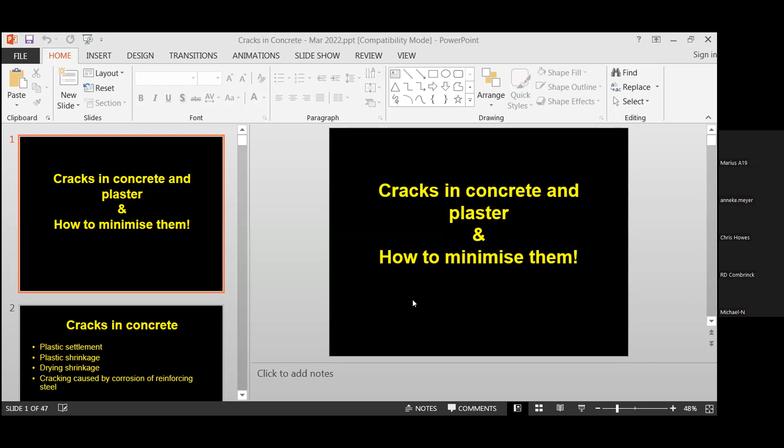Right, so the title is Cracks in Concrete, and it's quite a long subject. So I've highlighted a few of the most common cracks, the ones that are most easily dealt with, and there's a list of them.

I'm going to talk about plastic cracks, which have been classified as non-structural cracks by the British Concrete Society. They have a publication called Non-Structural Cracks in Concrete. I'll show you an interesting case study where one of those cracks, a plastic settlement crack, had a structural aspect to it, causing a failure. Then I'll spend some time on drying shrinkage cracking and also cracks caused by corrosion of reinforcement steel, because that's quite an important cause of cracking.

What I want to say at the outset is that it's easy from an academic point of view to classify cracks into these categories. But very often when you diagnose a cracked structure in practice, you'll find there's a combination of factors which result in a crack being what it is. Very often it starts as a plastic settlement crack, which becomes wider because of plastic shrinkage, and then as the concrete hardens and dries out, it becomes even wider still due to drying shrinkage, and can become a lot longer and wider. So in the real world, it's a little less easy to categorize these cracks.

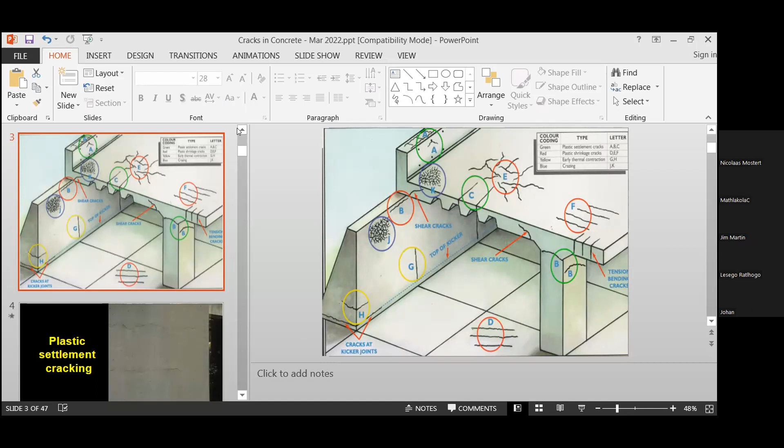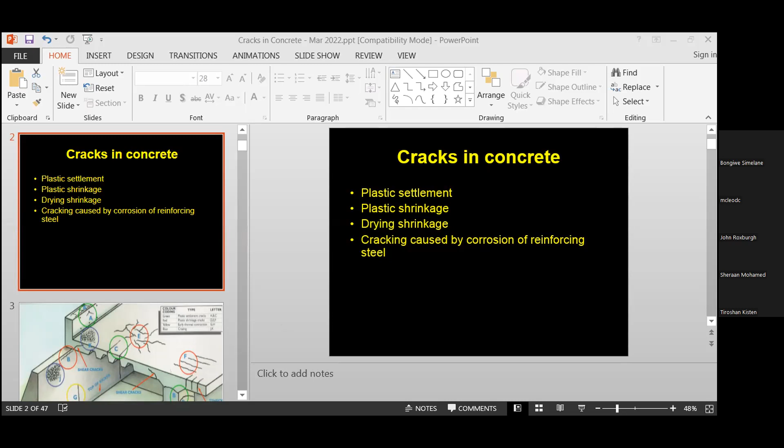It's not going to the next slide. Could I suggest you click on the presentation icon, just to the left of the size percentage bar? Let's see if I can find it. Sorry Rod, can you go back to the previous slide for a moment? There, can you see it? Okay, yes. Can I go forward? The toolbar from Zoom is getting in the way. If you look in the toolbar where it says comments, click the icon four positions to the right. I'm trying to get there but the Zoom toolbar is blocking it. Click on the Zoom toolbar, that should take it away, then you should see your full screen so you can get to presentation mode. It just keeps coming back, Hanley. Can I stop sharing for a moment? Yes, sure. Is that any better? At the moment you're not sharing, we can't see your screen. Okay, I'll go back and share. We had a comment that F5 is the shortcut to start the slideshow, so once you start sharing, try F5. You're still not sharing at the moment, Rod. Yes, I've got to get back to the share screen. I've lost that share menu altogether now. Just click at the top or bottom of your screen to get the menu back. Please look at this. Oh yeah, hello, can you? If you click anywhere on your screen, or move your mouse, you should get the bar back where you can start sharing. Right, usually there, I've got it. Let's come back, there we go. Can you see it? No, mate. Click on share screen, share. Okay, now it says you've started sharing. Now try F5, Rod. I'm pressing F5. At the bottom of your screen, three spaces to the right of your cursor should be presentation mode. Just move your cursor up to the black line, a little higher, a little to the side, a little down again. In the black line at the bottom you see notes, comments. No, I don't see notes or comments. Can anybody else assist Rod? If you can see your top toolbar, click on slideshow and start slideshow. Click on slideshow, there we go. Okay, I've clicked on it. Double click. Okay, from beginning, click on from beginning. Go to your left, from beginning. There you go, click. Yeah.

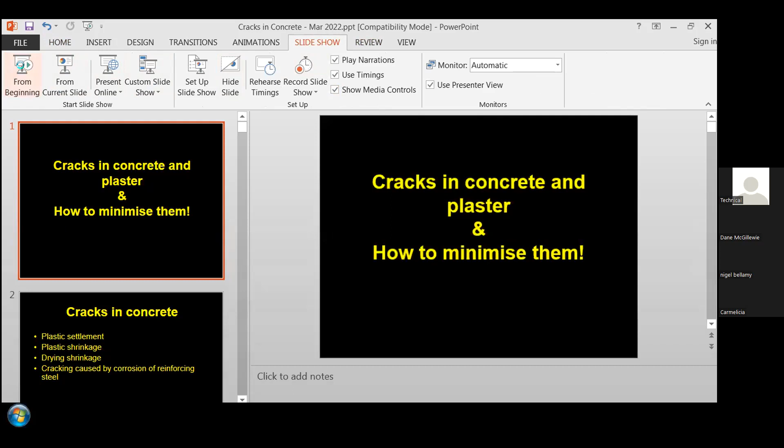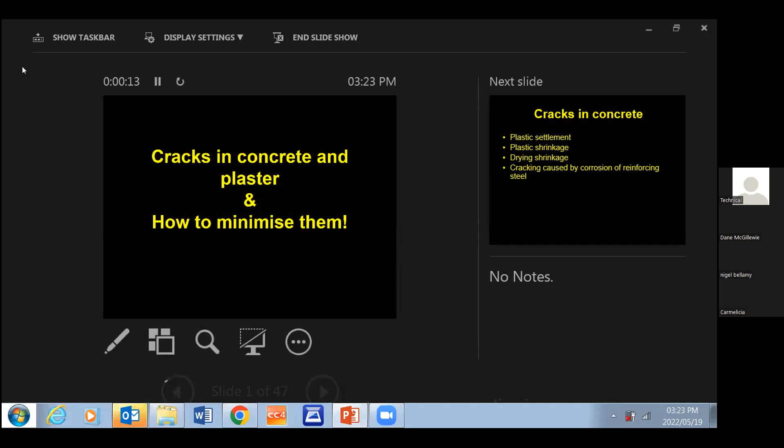Okay, what can you see now? Okay Rod, there's obviously some setting issue in your presentation, but I think you can carry on. We can at least see the presentation. So you can start with yes, let's do it that way.

So there's a schematic diagram that shows the cracks in their purest form, as you would classify them. In reality, they're often a combination of different factors that result in the crack's final proportions and shape.

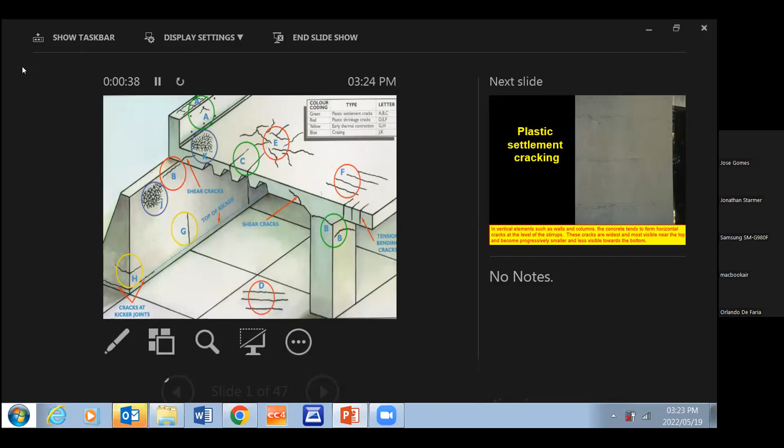The first type of crack here is plastic settlement cracking in columns. This is an elevation of a column, near the middle of the column I suppose.

What causes these cracks is the fact that the solid ingredients in concrete - the stone aggregate, sand, and cement particles - have a relative density greater than water. If you imagined a bucket of water into which you threw handfuls of sand, stone and cement, the solid particles would settle to the bottom. The same thing happens when you mix an homogeneous mixture of concrete, place it, and compact it - the solid particles start settling downwards.

They're pulled down by gravity, and the rate of settlement depends on the size of the particles. Bigger particles tend to settle faster than smaller particles because of a phenomenon known as Stokes' law. It's got nothing to do with density - it has everything to do with the ratio of volume to surface area. Very small particles have low volume and big surface area, so they're more inhibited from settling by drag. But the potential for settlement is greatest at the top of the wall or column and least at the bottom.

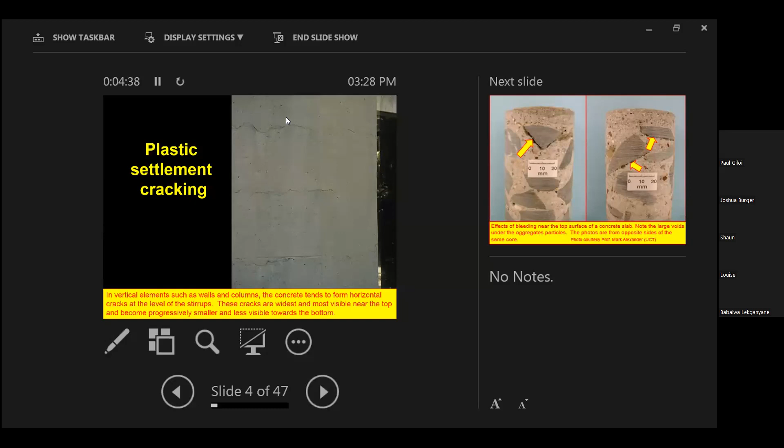The cracks tend to be narrowest near the bottom of the column or wall, and widest near the top - purely because the relative propensity for settlement is much greater at the top than the bottom. If you test concrete for durability properties, you get much better results drawing cores from the bottom than from the top, because there's much more water near the top, and more of these cracks near the top.

Here's a picture of a core - the same core, front and back - where you can see what we call bleed water discontinuities beneath the horizontal surfaces of coarse aggregate. And here you can see some more bleed water discontinuities, caused by the bleed water being trapped beneath these horizontal surfaces.

Here you can see some more alarming ones on a column. These are very typical, and they also occur on horizontal surfaces. This is a surface bed, in fact a raft foundation. What you see here is the cracks form a regular geometric pattern, which corresponds exactly with the reinforcing mesh that was used here. These are roughly 200 millimeter by 200 millimeter cracks.

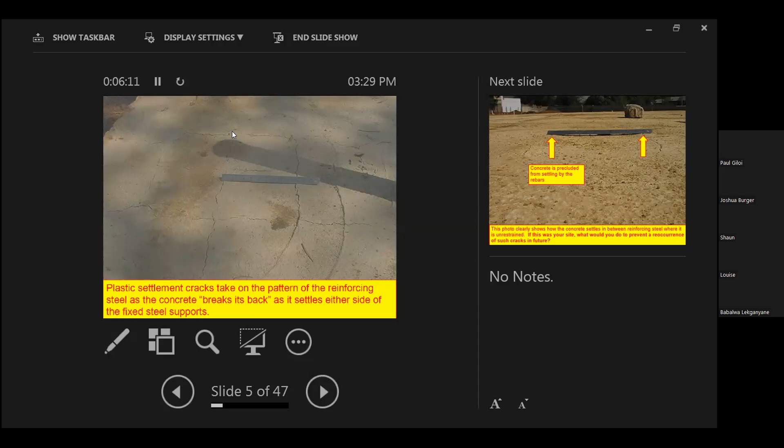In the case of a slab, the reinforcing provides a restraint on the settling aggregates and particles. The only way these aggregate solid particles can move around the reinforcing bar is if they move laterally, sideways, before they can move vertically downwards. As a result of that sideways movement, the concrete effectively breaks its back over the reinforcing steel, which is fixed in space. If you look at a very acute angle, there's a straight edge here, and you'll see a gap forming between the bottom of the straight edge and the middle of that span. So the highest points on the concrete are directly above the bars, because the bars are supporting the concrete and restraining settlement. But in the middle, the concrete's free to settle.

So the million-dollar question: if this was your job and there was a risk that your company wasn't going to be paid because of these unsightly cracks, what would you do? It's difficult to ask the audience for an answer here, but I'll just put you out of your misery and tell you — the thing you would do is revibrate the concrete.

You'd put your poker vibrator in half an hour or an hour after you've initially vibrated it, and stir it up. You can't prevent these cracks forming, but once they're formed like this and the concrete's still plastic, you can eliminate them. By putting your vibrator back in and vibrating the surface, you shake off those stones which are precariously supported by the rigid reinforcing bar. You shake them to the left and the right, and it flattens the surface and knits the concrete together. It knits those cracks back together. It's as simple as that.

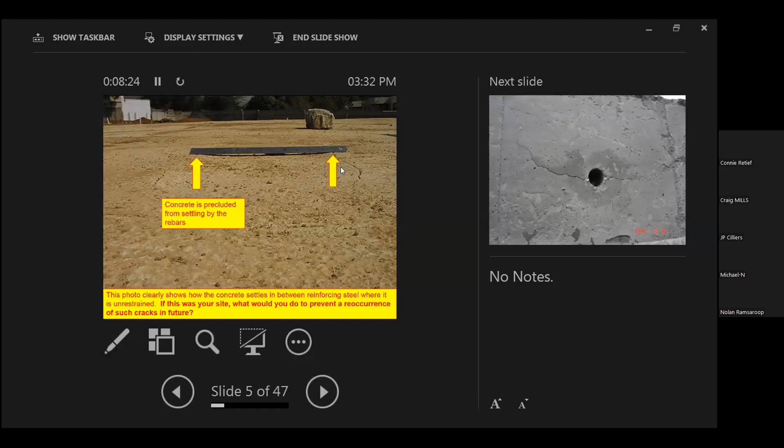One must bear in mind that after you've revibrated, settlement will continue again. So you've got to keep on revibrating the concrete until such time as the concrete goes hard. People often say, won't we over-vibrate the concrete? The answer is no, you won't — I've proven it. If the mix has been properly proportioned and well designed, all that will happen is you might get a little bit more stone near the bottom, but you won't have any cracks. It's far better to vibrate the concrete more than you need than to under-vibrate it and risk all the problems that come with under-vibration.

Now, the same mechanism occurs where you've got a tie bolt hole. This is a tie bolt hole in the shutter, and exactly the same thing happens. The concrete above the tie bolt is supported and restricted from free settlement, but the concrete underneath the tie bolt is free to settle. Again, the remedy for these cracks is exactly the same — just revibrate the concrete. On a shutter, it even helps to just take a rubber mallet and thump the face of the shutter. That stirs up the concrete near the surface and eliminates those cracks.

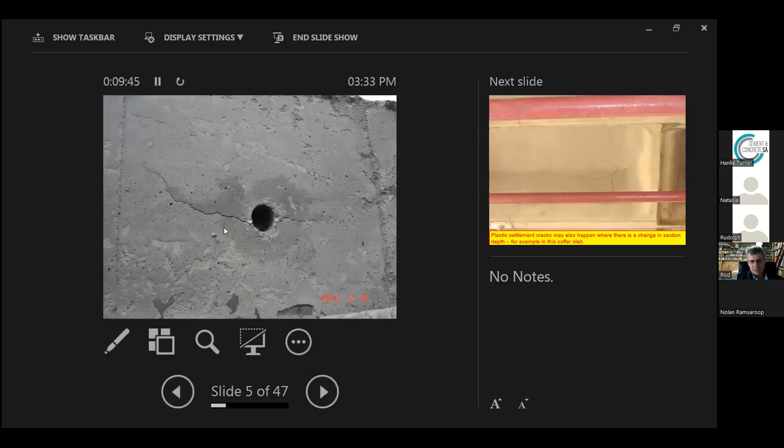It's really worth doing that because clients get quite upset. In that first picture I showed you of the raft foundation, the contractor didn't get paid for that. He had to cast a new slab on top at his own expense, despite the fact that several engineers, including myself, went to site and assured the client that these were non-structural cracks. If he was going to put a screed on top of them, there was nothing to worry about — they were dead cracks, very unlikely to reflect through the screed. The client insisted, and that caused the contractor a big loss.

Here's something interesting — this is a coffer slab. What happened here was they overdosed a lignosulfonate-rich admixture, and the concrete didn't set for several days. Now, if the concrete remains plastic, it continues to bleed and continues to settle. If it remains plastic for a prolonged period of time, the plastic settlement cracks just become larger — longer and wider and more unsightly.

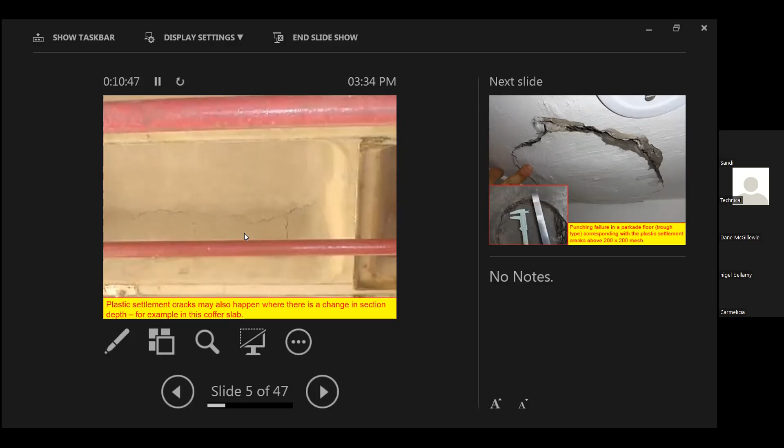So if you ever have a situation like this, where the concrete's not setting because it's very cold or it was overdosed with a retarder or lignosulfonate admixture, the thing to remember is to put the poker vibrator back every few hours and give it a stir. It won't affect the hydration, won't affect the setting much, and it's worth doing to eliminate these unsightly cracks.

Now, this is an interesting case study — this is the one I told you about, where these so-called non-structural cracks became critical and structural. This was a parkade in Bank City with a coffer slab, and the coffer slab was only 75 millimeters thick.

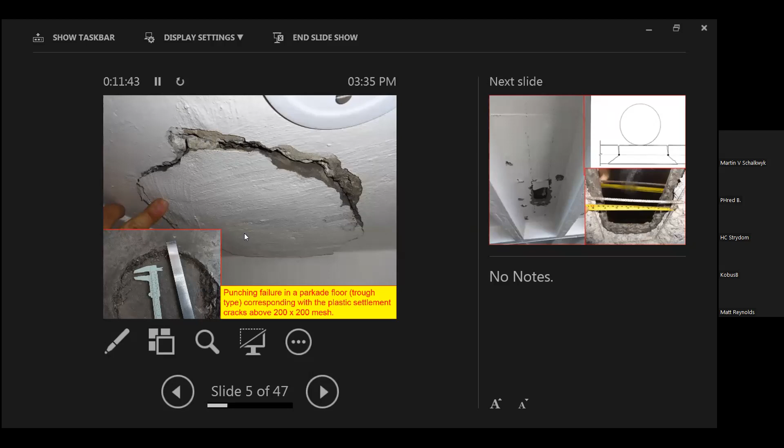In the middle of this coffer slab was a light steel mesh, right in the middle of the 75 millimeter thick section, a 200 by 200 mesh. And it just so happened that the dimensions of the mesh, 200 by 200, coincided almost exactly with the footprint of a motorcar tire. So when a motorcar drove over this, the full weight was borne by this little area of concrete.

Here's a little schematic, and you can see there's the mesh, another piece of mesh, the motorcar wheel, and the plastic settlement crack has caused a discontinuity between the top of the steel and the top of the slab all around the perimeter of the square mesh. So it's effectively reduced the effective depth to resist punching shear.

So all that was necessary was for a little area to punch out, about 35 millimeters deep. And there you can see the result of the punching. They had put a plate of mirror steel on top facing downwards, so you could see the reflection of the tape measure and the mesh here. But what's quite interesting is how the perimeter of the piece of concrete that fell out is defined by the mesh, the 200 by 200 mesh.

What we also found investigating is there was some plastic electrical conduit stuck in, fastened to the mesh, which made the situation even worse. But fortunately, it was restricted to just some local areas.

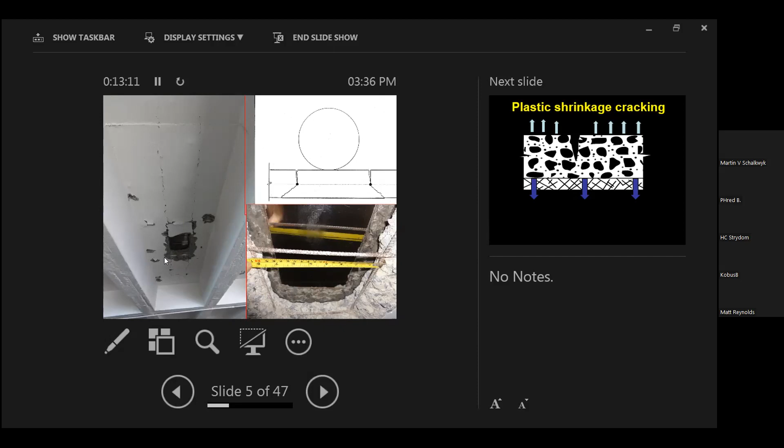Remember that as a rule of thumb, concrete has about 20% volume of water. With admixtures today, we get that down to about 17%. But if there's any loss of water, only two things can happen: either a complete reduction in the volume of the concrete, or it leaves voids behind. It's due to the reduction in volume that we get these cracks.

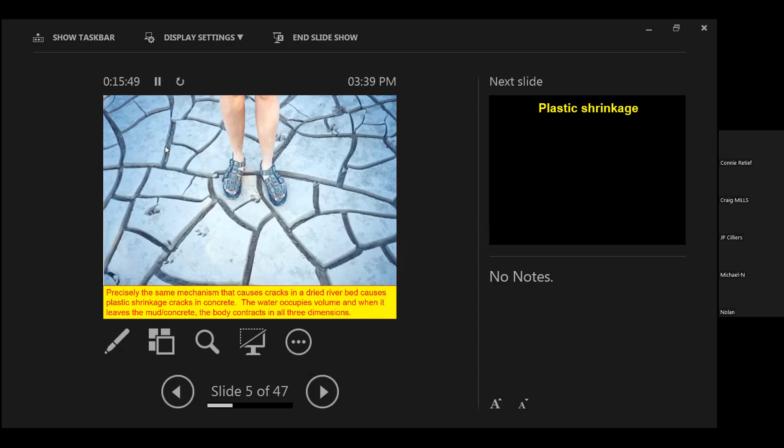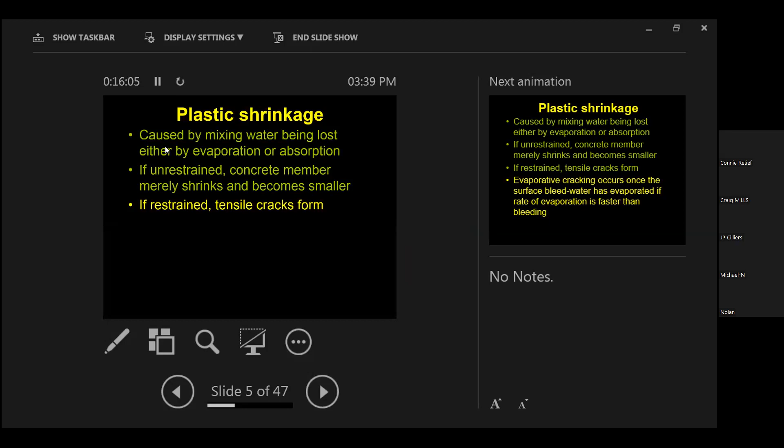And the patterns you get are very much dependent on the conditions at the time of placing the concrete. So this note really says that if there's no restraint, there's no cracking. It's very prominent in the interior of the country, very prominent on the highveld between the months of the beginning of August and the end of October, because this is the driest part of the season.

When you're placing concrete under conditions which are hot, going up to 30 degrees, and sunny and windy, where the relative humidity is low, then you get the maximum rate of evaporation of your bleed water. So when the rate of evaporation of water exceeds the rate of bleeding and the concrete surface becomes dry, that's when you're most at risk of these cracks. There's times of the year in Johannesburg where the weather's so non-conducive to placing concrete that I advise people not to place concrete.

If you've got 20 kilometer per hour wind on a 30-degree October day when the relative humidity during the day drops less than 10%, don't even try to place concrete.

To some degree, the presence of bleed water is a godsend because it's sacrificial. While there's a layer of bleed water on the surface, evaporation can't dry out the concrete itself. It's once the bleed water starts evaporating and disappears that the surface dries out very quickly. The presence of admixtures or additives that inhibit bleeding, something like silica fume or microsilica, would exacerbate this problem. So never ever put silica fume in a slab which you're going to cast outdoors. Not a good idea.

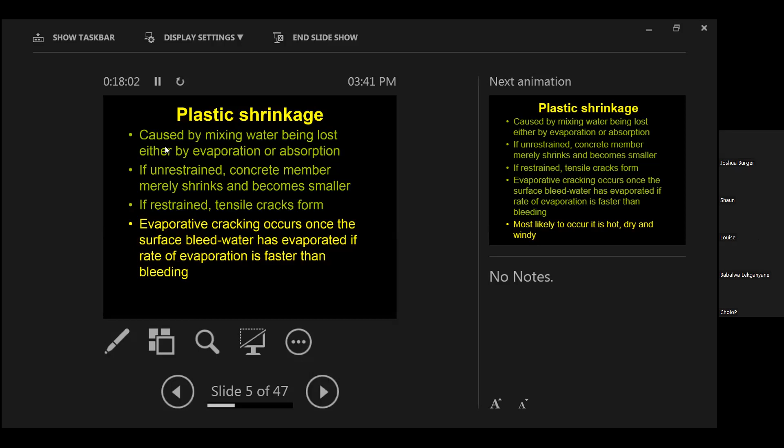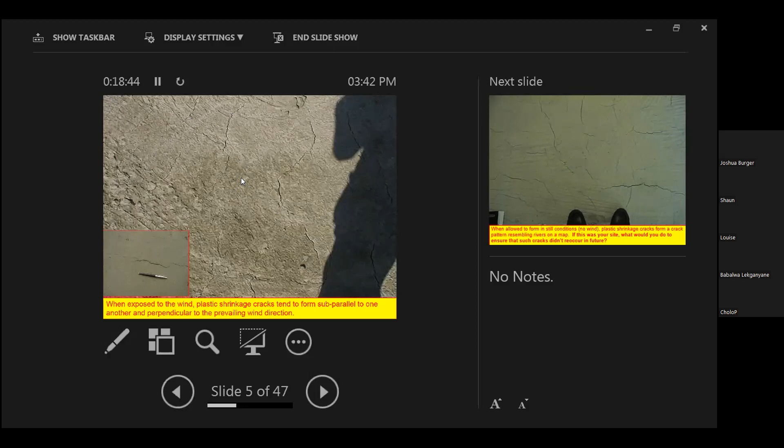This next picture shows the sort of crack pattern you might expect to get if you were casting concrete outdoors. The cracks tend to align themselves at about 300 to 500 millimeter centers. They can be anywhere from half a meter or 300 millimeters long to a couple of meters long. The cracks tend to form perpendicular to the prevailing wind. So in this case, the prevailing wind might have come from this corner inwards, or from this corner of the photograph.

This is the type of crack pattern you might expect to get if you were casting indoors or on a day when it was very still. Those cracks tend to be more randomly orientated, and they tend to resemble rivers on a map.

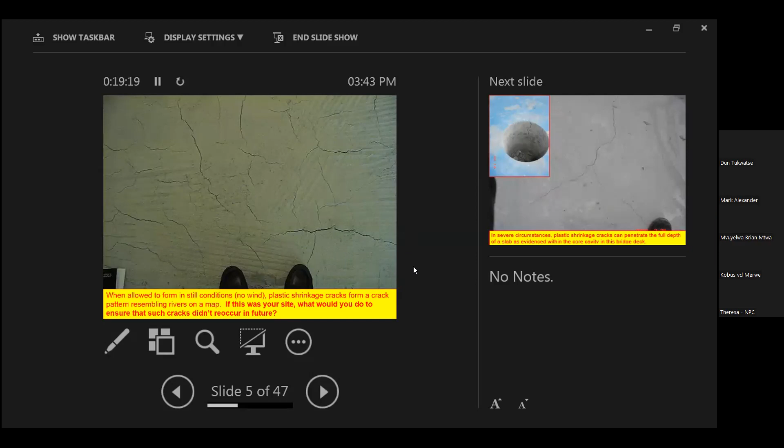Now, another characteristic of these plastic shrinkage cracks is they never terminate at the edge of a slab. They tend to terminate short of the edge. It's an interesting thought experiment to think why that is the case, and I'll tell you as well. The reason is because the edge of the slab is free to contract inwards. The concrete can pull away from the shutter quite easily, and if it can do that, it loses its volume without forming a discontinuity. It's able to shrink without forming a discontinuity.

Once again, the million-dollar question is, we don't want these cracks on our site. What do we do to prevent these cracks ever happening? There are two things you can do.

If you are casting concrete on consolidated earth, such as a surface bed or a foundation, people always say put plastic down, and yes, that would work, but it's expensive. A much more cost-effective solution is to take a hose pipe and pre-wet the soil the night before, and if necessary, give it a mist spray on the morning that you cast the concrete. That's the first thing you can do - it would prevent excessive loss of water by absorption into the soil.

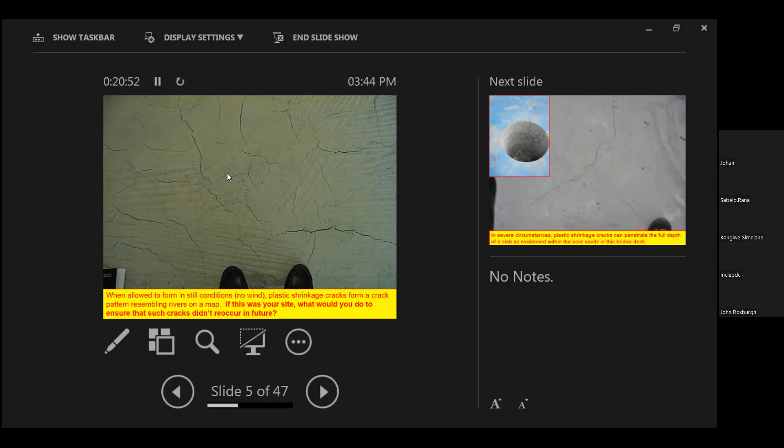The second thing you can do is to cover your concrete while you're placing and compacting it, sometimes if the weather's bad. And certainly when you've finished placing and compacting, just cover it with plastic, weight the plastic down around the entire perimeter with bricks to prevent any air tunnel effect, and leave it so it doesn't dry out prematurely.

This is just a picture of a core which shows how deep these plastic shrinkage cracks can go. If you get some severe plastic shrinkage, and if you get some absorption from the soil below, yes, it can go all the way through. I've even seen suspended slabs where they go all the way through - you take a bucket of water or a watering can, sprinkle it on top of the slab, and you run down and watch it leaking out of the soffit. So they can go all the way through.

Now, we get exactly the same phenomenon happening in plaster, and it's even more severe in plaster in some ways, particularly if we're plastering burnt clay bricks. You get this typical pattern, I call it a polygonal pattern of cracking.

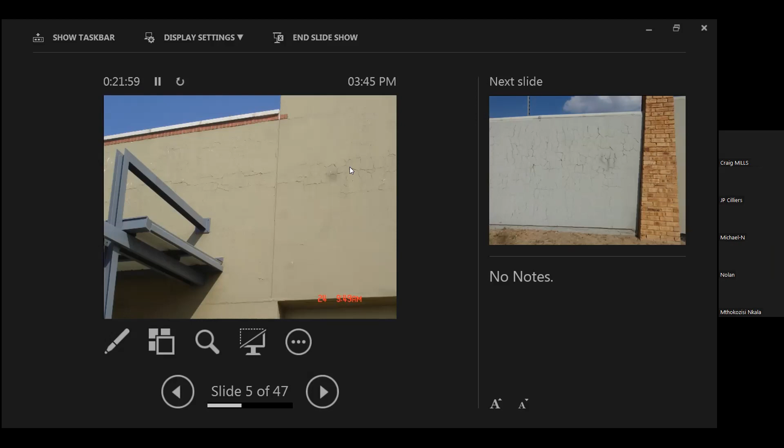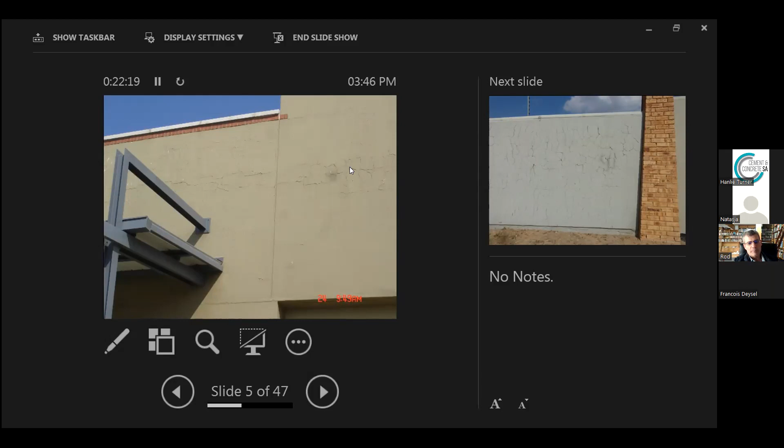I was once traveling to Bloemfontein on business at about 2 o'clock in the afternoon. I stopped at the Ultra City outside Bloemfontein, and they were plastering a west-facing wall in January on a baking hot summer's afternoon, and they hadn't pre-wet the clay bricks. I kid you not, but as the plasterer took his trowel and applied the plaster, you could see the cracks opening up just behind where the trowel had gone. These cracks happened literally in a couple of seconds of plastering.

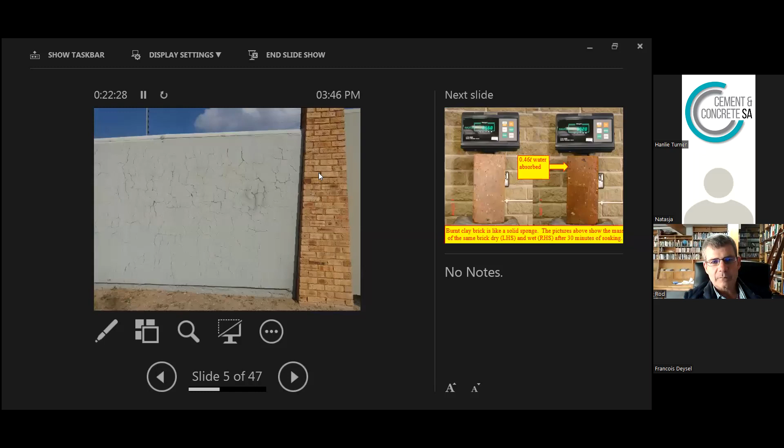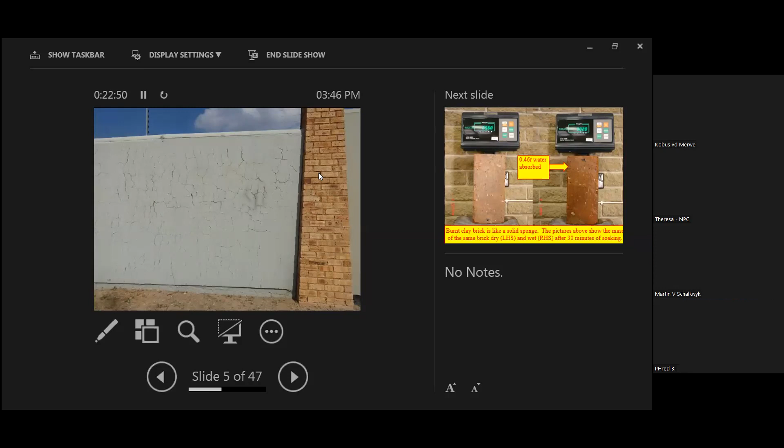Here's some more, very typical. And with time, these cracks become bigger because of drying shrinkage. But there's another phenomenon. The plaster, because it contains Portland cement, has an overall tendency to shrink over time. But burnt clay bricks have an overall tendency to expand over time due to what we call irreversible moisture expansion of brickwork—a phenomenon that occurs at the atomic lattice of the clay mineral. Take my word for it, over time clay bricks tend to expand. So imagine that combination where you've joined these two materials together, moving in opposite directions. The cracks just get wider and wider over time.

A big problem occurs when owners complain that this is a defect and the builder must redo it at his expense. They usually believe this because of the guarantees offered by paint suppliers—most suppliers of acrylic paints today offer a 10 or 12-year guarantee. But if you call the paint manufacturer to come and look, he says, no, this is a defect in the plaster, it's the substrate which has failed, and our paint is only as good as the substrate, so we don't honor our guarantee. The problem is that there's no acrylic paint in the universe which can accommodate this degree of movement.

Imagine a hairline polygonal plaster crack that starts off life at the time you apply the paint—it might be 0.05 of a millimeter wide. You put this acrylic paint on top, and because of irreversible expansion of the bricks and shrinkage of the plaster, it opens up to 0.1 of a millimeter. The difference between 0.05 and 0.1 of a millimeter is 100%. Do you expect that paint to stretch 100%, to elongate, to double? An elastic band can do that, just, and it perishes very quickly. Acrylic paint can't do that. So builders get blamed for this sort of thing unfairly.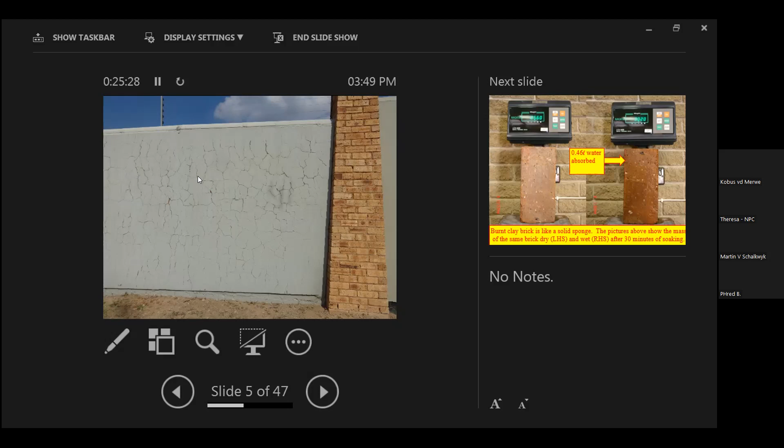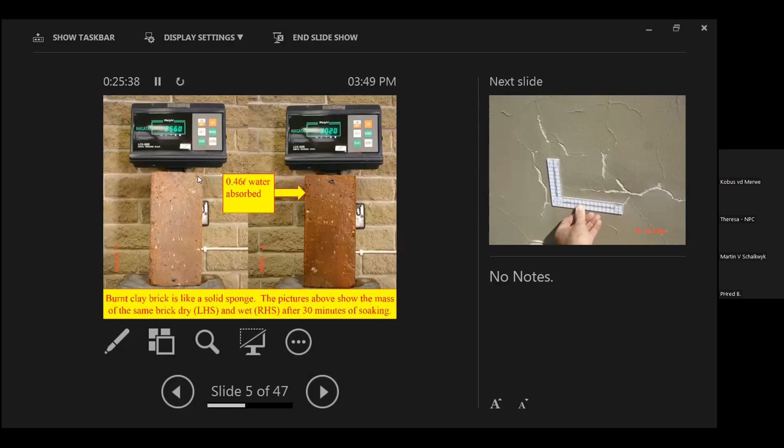This is just a photograph to show you how much water a clay brick absorbs. This is why it's so important to pre-soak burnt clay walls before you plaster them. Otherwise, can you imagine each brick sucking half a liter of water out of the plaster? The plaster doesn't stand a chance—it's going to shrink and crack, and it's not going to hydrate like it should.

What you find after some time is that the paint starts peeling and flaking. When it rains, the rainwater enters these cracks. If you dig with a spike or rub with a wire brush, you'll find the plaster is very soft adjacent to the cracks, but actually quite good in between them. This is because rainwater running down the face of the wall enters the cracks and dissolves the cement paste. Cement paste is water soluble, just like rainwater dissolves limestone and dolomite in caves, forming solution cavities. Rainwater also dissolves cement paste from inside the cracks.

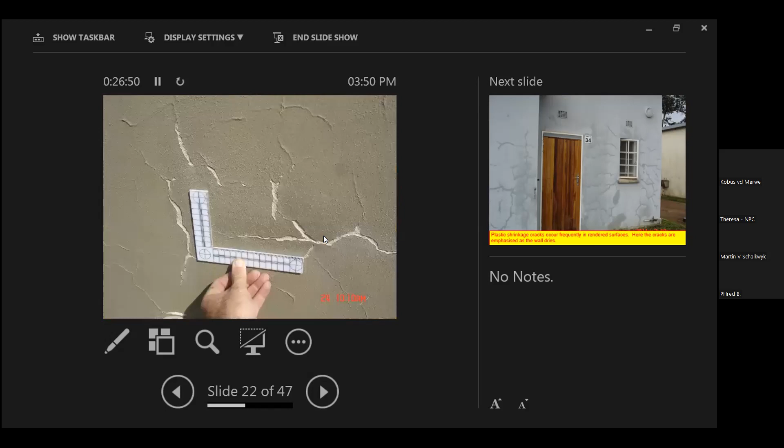So the longer these are left untreated while the owner has a dispute with a contractor, the worse the situation becomes. With acid rain it's even more rapid, because acidic water is far more aggressive to cement paste than just fresh, soft water, which rainwater is. It's always soft water because it's got very little dissolved minerals inside it, so it's hungry for whatever it can extract from the cement paste.

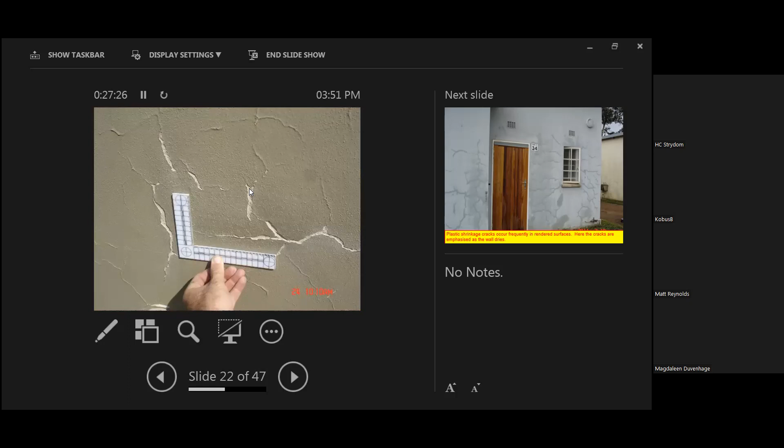These cracks always look far worse after the rain—that's a characteristic of cracks. If you want to take a photograph of a crack, you're often disappointed that when you develop the photograph, you can't see it. One way to make it stand out is to sprinkle some water on it—the water in the crack is the last thing to dry out. Then you take a picture when the surface is basically dry but the crack's still wet. It's just a trick. Failing that, what I sometimes do is draw with a piece of chalk to emphasize where the crack is. But then in your report, just acknowledge that you used chalk.

Now here's an interesting picture. This is a picture of the schoolhouse - a replica of Herman Charles Bosman, the South African writer and poet's schoolhouse. He was a school teacher and had a schoolhouse just outside of Gaborone. The people of the Groot Marico Herman Charles Bosman Society decided to build a replica of his schoolhouse in the Groot Marico, on the way out to Zeerust.

They used traditional materials to build the school, so they used sun-dried bricks. I think the only time they used Portland cement was in the foundations - otherwise everything else is traditional. They plastered this schoolhouse with a mixture of cow dung and clay. But right at the back of the schoolhouse, on the inside back wall, they left about a square meter to show how the materials were applied.

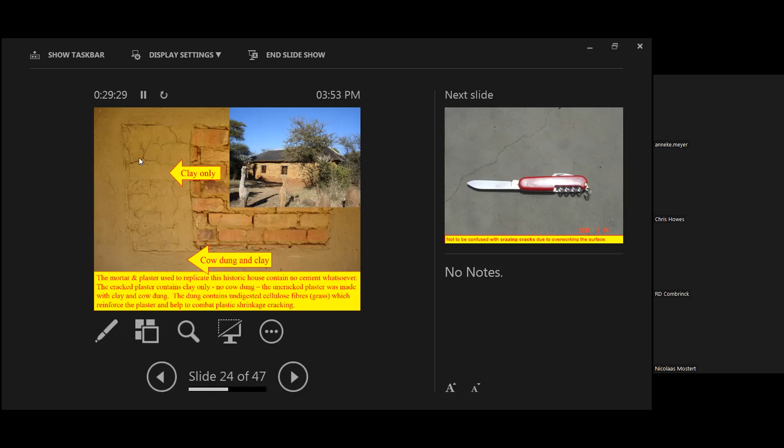You can see the sun-dried bricks here, and then on this little portion they left the cow dung out. Look how it has cracked - very, very big. These are plastic shrinkage cracks. Compare the size of the cracks here - well, you can't see them at all. There's no visible cracking where the cow dung was.

What's magic about the cow dung is it contains undigested cellulose fiber from the cow's digestive tract. The cow cannot digest the cellulose fiber, so those fibers form fiber reinforcement for the plaster. In medieval times in Europe, they did something similar - they would take horsehair from brushing their horses and mix that with the plaster, and these plastic shrinkage cracks would disappear.

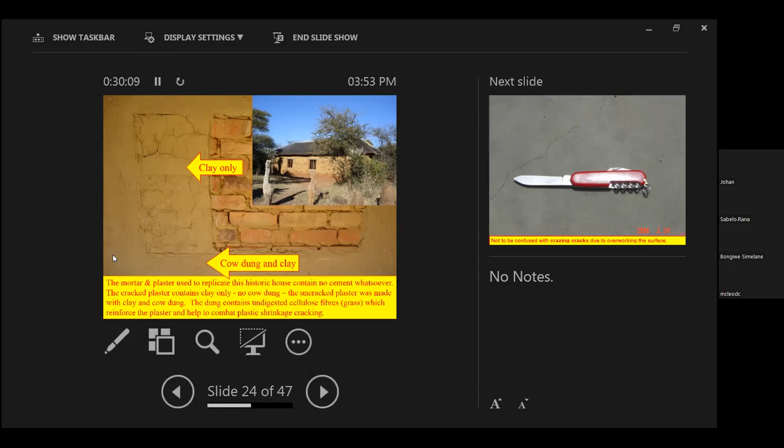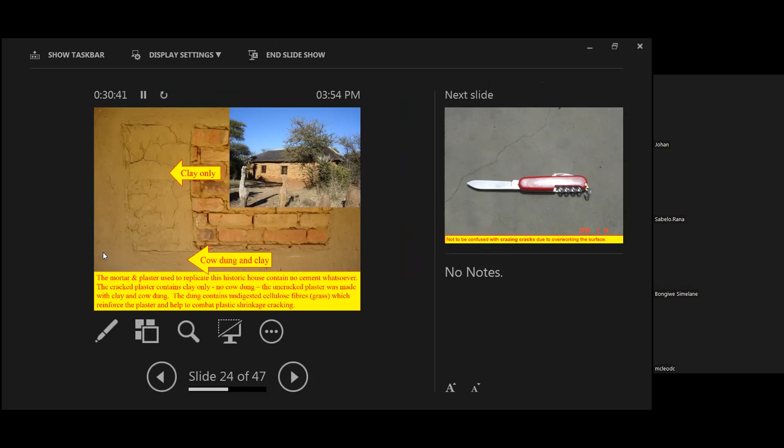Nowadays you can buy polyester or polypropylene fibers. I don't mind which ones you get. Polyester is attacked by high alkalis, but it really doesn't matter, because by the time the polyester is attacked the fibers are redundant - they've done their job. They've distributed the forces which caused the cracking and thereby prevented any visible cracks. So it's something I would recommend you consider if you want to combat the problem of cracking in plaster.

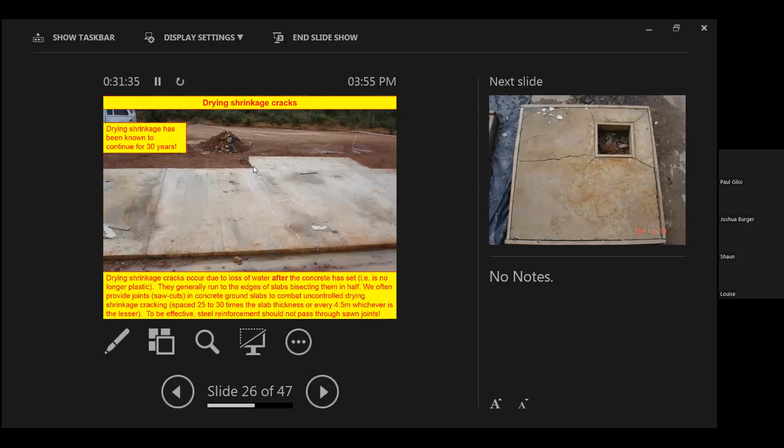Then we've got the drying shrinkage cracks. These are due to the shrinkage which happens after the concrete is hardened, as opposed to plastic cracks which occur before the concrete hardens. The reason we saw-cut industrial floors is to enable drying shrinkage to take place freely by the cracks opening. You may be able to see the chalk lines I've emphasized - the cracks tend to emanate from re-entrant corners. A re-entrant corner causes a stress concentration, and that's where you're likely to have a crack.

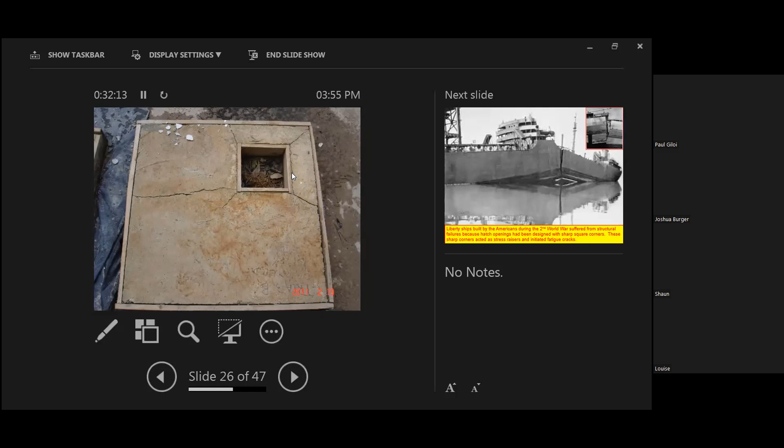What's very typical about drying shrinkage cracks is that they tend to run from edge to edge - they tend to bisect a slab. If a slab is long and thin, it will bisect the slab transversely somewhere in the middle third, because that's where the stresses are highest. You'll see this piece of concrete - every corner has a radial crack coming out, due to the stress concentration caused by the re-entrant corner. This is a phenomenon that occurs in all materials.

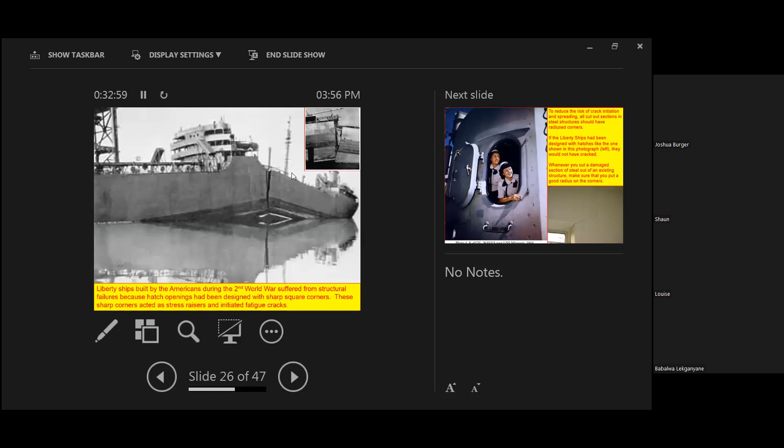In the Second World War, the Liberty ships built by the Americans for the Allies mostly cracked up. They tried to make these ships very quickly and cheaply, so the windows were cut out square. In a high sea the ship becomes a simply supported beam, with a lot of bending going through the hull, and you get a lot of fatigue at the same time. A stress concentration would typically form at a sharp right-angled corner of a window, and that would start running down the bulkhead, through the deck, into the hull, and keep running until the ship broke in two. It's overcome these days by making portholes, windows and doors oval.

Instead of having sharp corners, which induce a lot of stress concentration, you round them off and reinforce with extra steel all around these doors and windows, and then you don't get a crack forming.

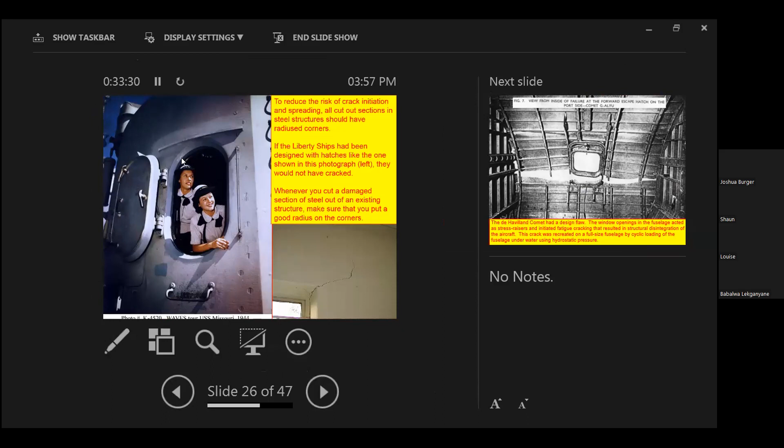The same thing caused the destruction of the de Havilland Comet, the very first passenger jet airplanes, built in the late 1940s, early 1950s. Several of them fell out of the sky, and when the third one fell, Winston Churchill made a famous speech saying they would do an investigation whatever the cost - no cost would be spared, and they would get to the root cause of the problem.

So they took a de Havilland Comet and filled it with water. They put it in a water tank, filled it with water, and pressurized and depressurized it, simulating what would normally happen in pressurizing a fuselage of a jet flying at high altitude, but only with water. The beauty of water is that it doesn't develop as much strain energy.

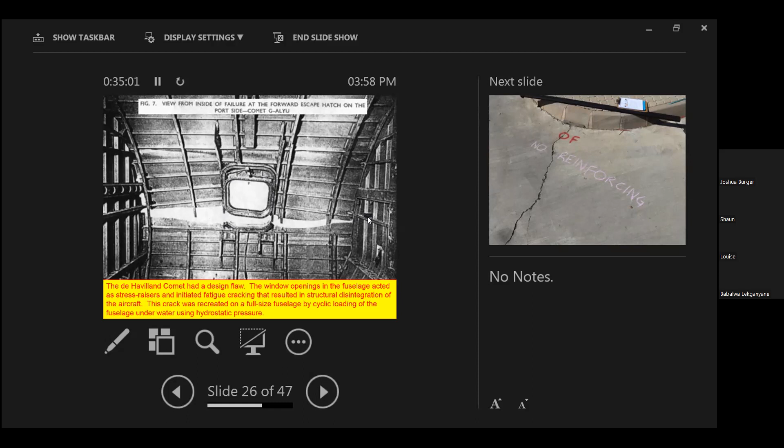If you had done it with air, the whole fuselage would have exploded, and it would have been very difficult to pinpoint the root cause of the crack. But by filling it with water, they were able to pinpoint the source. It was a window just behind the cockpit in the fuselage. It had a stress-raising effect, and it caused the fuselage to split. Unfortunately, by that time, the de Havilland company had suffered so much financial trouble that it never really reestablished.

The same thing happens in concrete, only you'll notice it doesn't really happen in concrete to have rounded edges. What you need to try and do in concrete is eliminate all re-entrant corners as far as possible. If you really do need them, you need to put lots of reinforcing, and a lot of it must run perpendicular to the trajectory that you imagine the crack to come out of. Remember, the crack always tries to radiate at 45 degrees from that re-entrant corner.

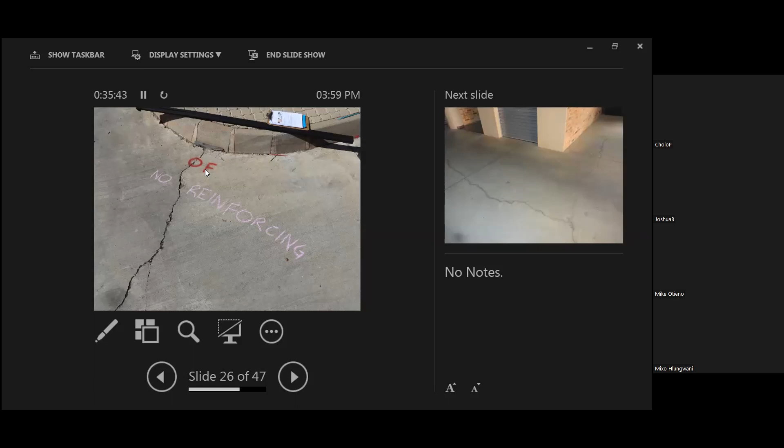But first prize is not to have re-entrant corners. Concrete really doesn't like re-entrant corners. The problem is that these cracks just run. Once a crack from a re-entrant corner starts, it runs, and as you see here, it can jump over saw cuts.

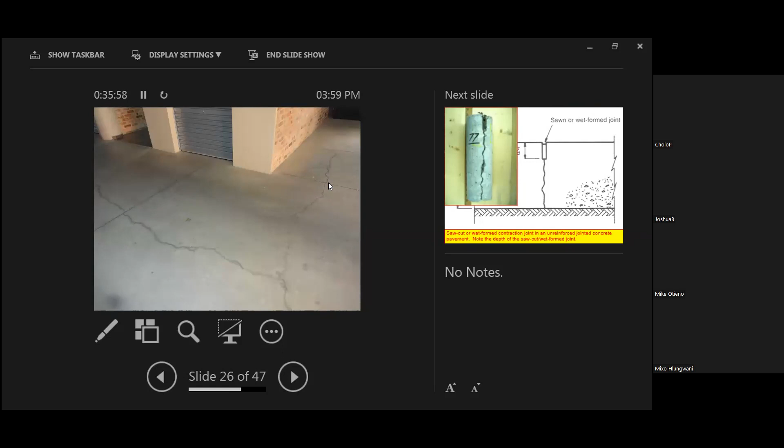This is the reason we saw cut slabs, slabs on the ground, and we cut to a depth of about a quarter, and that induces a crack underneath. It's quite important to note that where you do this, you mustn't have too much reinforcing steel. There's a good argument for not having any, but there certainly mustn't be more than about 0.8% absolute maximum going through here, or the reinforcing will actually preclude the crack from opening.

If the crack can't form and it can't open, it cannot alleviate the drying shrinkage stress. Yet this is one of the most common mistakes we see in construction: people put big reinforcing bars running transverse across the crack.

The reinforcing steel should be terminated, certainly the heavy reinforcing steel, either side of the joint. The problem is you've got to know exactly where your joints are going to be at the time that you lay your reinforcing steel, or you can't do that. So planning is critical, planning ahead. You can't just say, well, let's think about where we're going to cut the joints tomorrow.

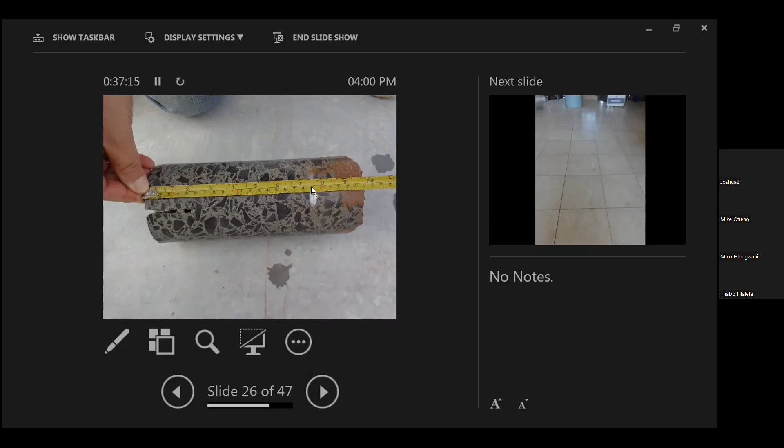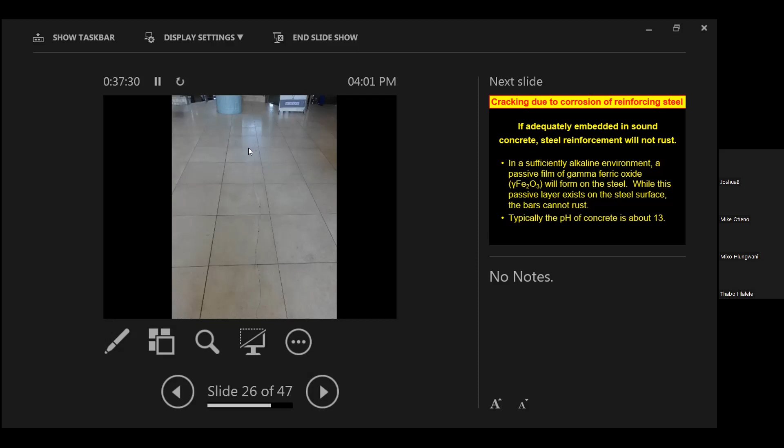That's too late. One's also got to be careful not to bond brittle finishes such as floor tiles directly over a saw-cut joint, like they've done here, or over any crack that is live, because then we get what's called a reflection crack going through these brittle materials. That's a cause of a lot of disputes in the construction industry.

Now I'll talk a little bit about cracking due to corrosion of reinforcing steel. There's a bit of chemistry here, but I'm not going to go into the chemistry. There are two mechanisms: an inland mechanism that's primarily due to a loss of alkalinity caused by carbonation, and a coastal mechanism that we get here due to chlorides.

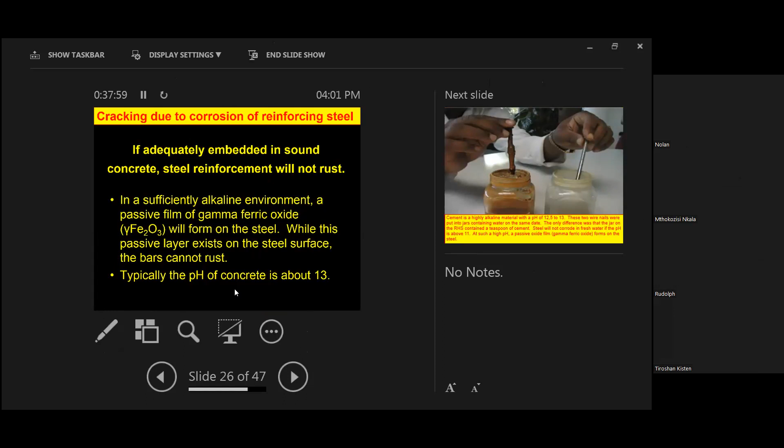The important thing to note is that when the corroding reinforcing steel rusts, the products of corrosion, the rust itself, which is a mixture of iron oxides and iron hydroxides, occupies a significantly greater volume than the parent steel. It's that increase in volume that causes the distress to the concrete initially.

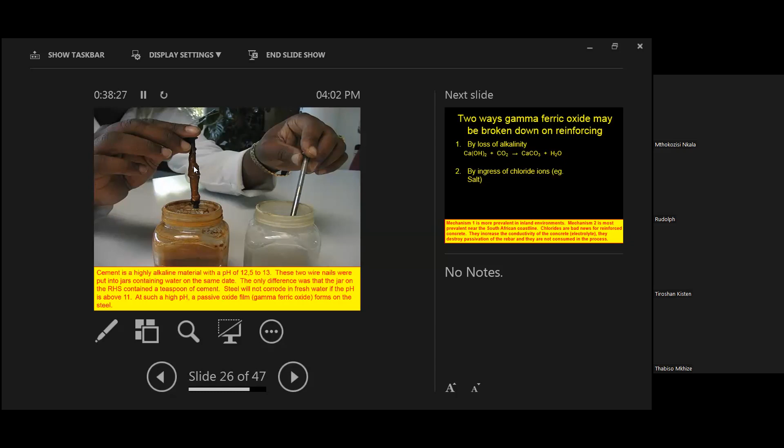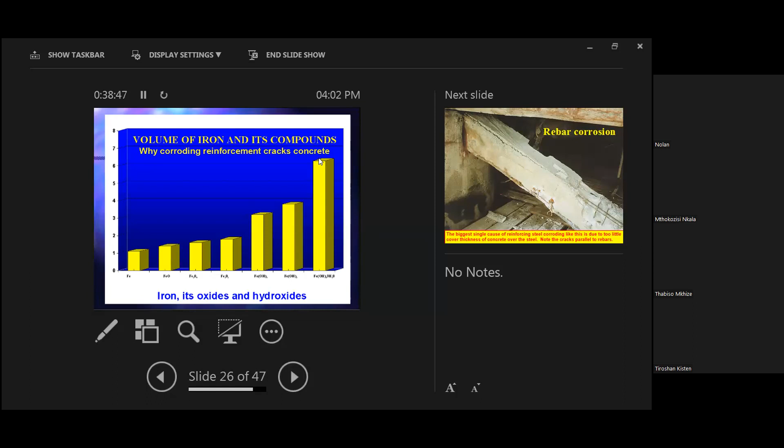So there's the two mechanisms, and here you can see a graphic showing the volume of the parent iron, and then the volume of all the oxide and hydroxide derivatives of the parent iron. You see this hydroxide actually goes up to just in excess of six times the original volume. It's that expansion that causes the initial distress.

Eventually, if you get sufficient cross-section of the steel lost, it'll lose its structural capacity and the structure falls down. But lots of trauma happens before then, lots of disputes happen before then. So we need to do everything we can to prevent this mechanism of cracking and corrosion.

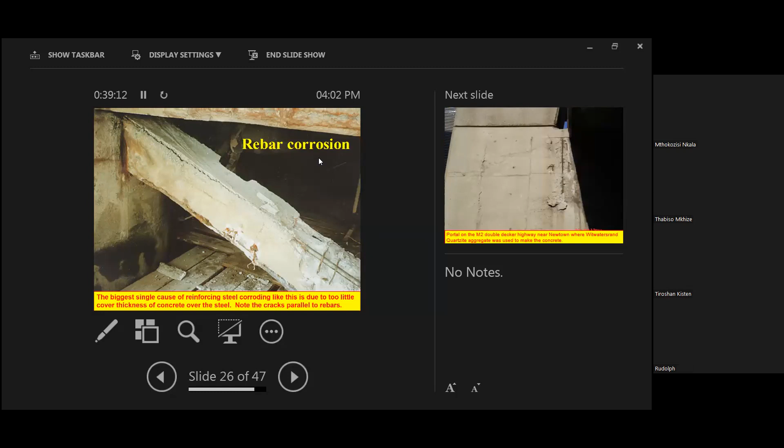One of the things you all know, I'm sure, is that one of the big causes of this cracking is where we don't have sufficient cover concrete over the rebar. This is a classic case of insufficient cover concrete. Often there's no cover concrete at all. But something not well known that I want to emphasize is that the reinforcing steel is most vulnerable, and starts corroding first, adjacent to joints, to cold joints at lifts.

What you're looking at here is the outer surface of a hyperbolic cooling tower of a power station.

Notice how the steel's predominantly corroding first at these lifts. Now, these lifts of concrete, where you join concrete placed a few days ago with concrete placed today, that is the Achilles heel of all concrete structures. That's the worst concrete, the most inferior concrete. Remember, the most inferior concrete is near the top of a lift because that's where the water migrates to. It's got the highest water cement ratio.

It's also the place where you've got a cold joint, and inevitably there will be cracks here because this concrete hardens before this concrete, and the two mixes don't knit together, and you get contamination of all sorts of things from dust to shutter oil to cigarette stompies. They accumulate at this lift, at this joint.

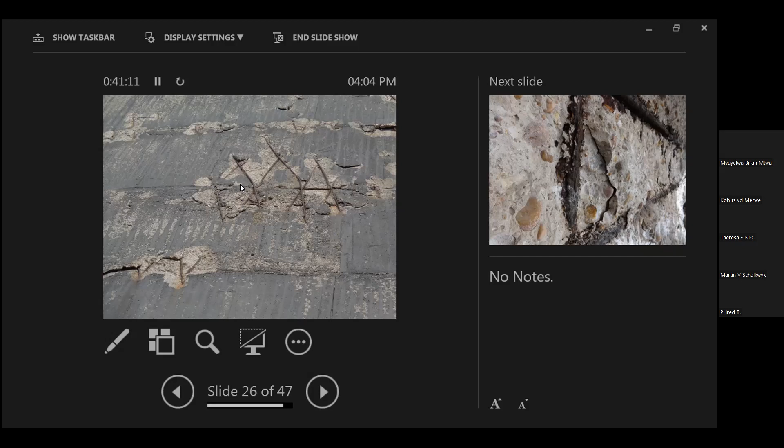You need to be cognizant of that. You can specify the most durable concrete, but the reality is that's going to be inferior. And we need to think about how we find a permanent lasting solution to that problem.

What we often find with severe corrosion is you get multiple planes of sheet delamination of cover concrete. So this is some concrete which has been affected by chlorides. And what you'll see is that you've got a freshly fractured face of concrete, which is more or less on the equators of the outermost mat of bars. In some cases, it's fractured through the stone.

But then there's another mat of steel, vertical steel bars deeper than that, and they form a second plane of failure along their equators. So you can imagine all these bars swelling in the same plane. The concrete between the bars goes into tension, and that has to be overcome. It takes a lot of force, but expanding steel generates a lot of force. And then you get a whole plane spalling off.

There's a rule of thumb that not many structural engineers know, and it's not written into codes of practice, and that is that the closest rebar spacing allowed is no closer than 5 diameters. And when engineers, and there's a growing trend, they're doing this more and more, they pack the steel closer and closer, and it's very common today to find engineers placing steel bars at 3 diameters apart. So you'll see Y25s at 75 centers, for example, or Y32s at 100 centers. It's too close. You're going to get problems with sheets of concrete delaminating prematurely with only slight expansion of the reinforcing steel.

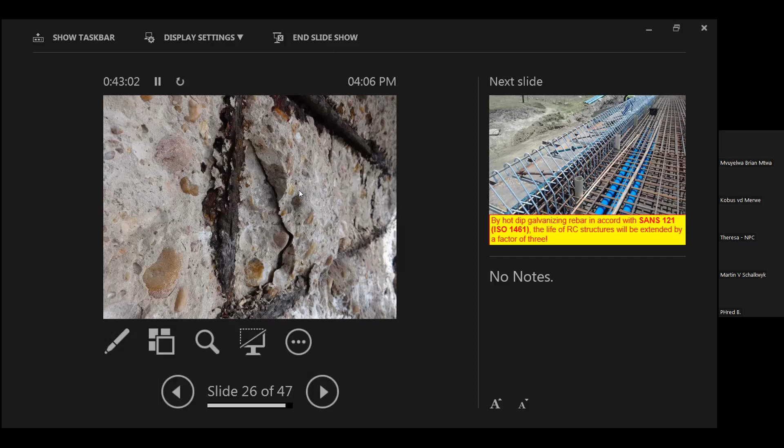The best solution I know to this problem, and it's not widely adopted, is to hot dip galvanize the reinforcing steel. Now, I've been to so many concrete conferences in my life where this topic is debated ad nauseum. And people complain, I mean, they've been complaining for 50 years that the contractor can't get the cover right, and the 4 C's we always talk about. And we still have this problem, and we still try to address it in the same manner that we've always done before. Read the Riot Act to the contractor.

And it's a little bit like insanity. Albert Einstein's definition of insanity is doing the same thing again and again and again and expecting a different outcome. And that's really what we're doing in the construction industry. If we just hot dip galvanize the reinforcing steel, we triple the life of the structure. It's a small premium to pay. You're going to nearly double the cost of the reinforcing steel. It's a small premium to pay in the greater scheme of things.

And we're seeing some of it being done now on our national roads. This is a Sandroll Bridge near Wakkerstroom. And they've galvanized just these bars here that are closest to the surface, the shear bars and the stirrups and things. But my philosophy is you might as well galvanize it all.

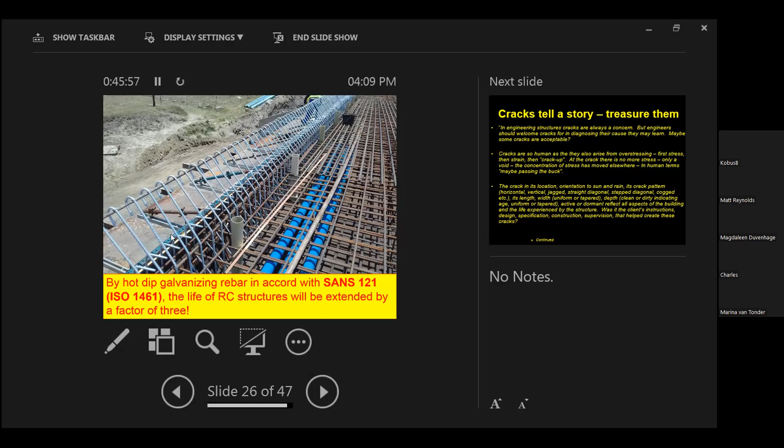Galvanizing of steel is not an alternative, and please don't ever think of it as an alternative to good site practice. It should complement good site practice. It's for those inevitable instances that the cover concrete is deficient in some way - the contractor doesn't get the required cover, or there's a lift which is a weak link in the chain, or there's some blowholes. It's those things that we're guarding against. We're not using it as an excuse for the contractor not to be diligent with good site practice and good concrete practice.

This is a poem that was given to me by my late friend, John Lane. I'll just read a couple of parts of it, and you can read the rest sometime in your own time.

It says, engineers should welcome cracks, for in diagnosing their cause, they may learn. Maybe some cracks are acceptable. Often our clients are too condemning of some relatively benign cracks. Cracks are often nature's way of putting a joint in where the engineer forgot or didn't think of it. Cracks are so human as they also arise from overstressing. First stress, then strain, then crack up. At the crack, there's no more stress. It's alleviated, it's gone, only a void. The concentration of stress has moved elsewhere. In human terms, maybe passing the buck.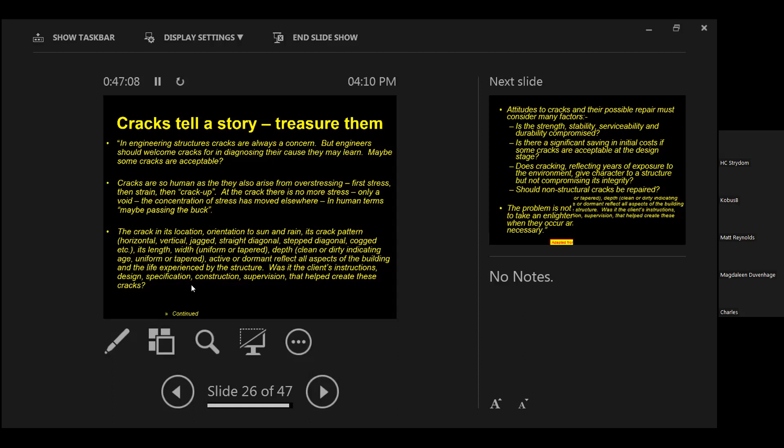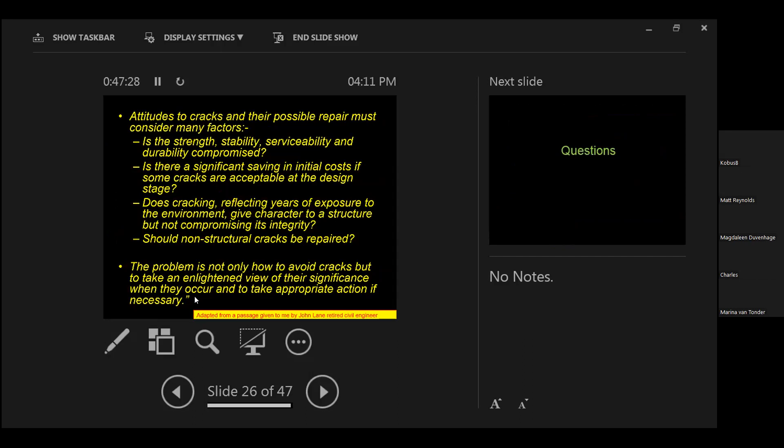He talks about how we must study the shape and pattern of cracks to learn more about them. It ends by saying the problem is not only how to avoid cracks, but to take an enlightened view of their significance when they occur and how to take appropriate action if necessary. So with those thoughts, I will say goodbye and invite any questions.